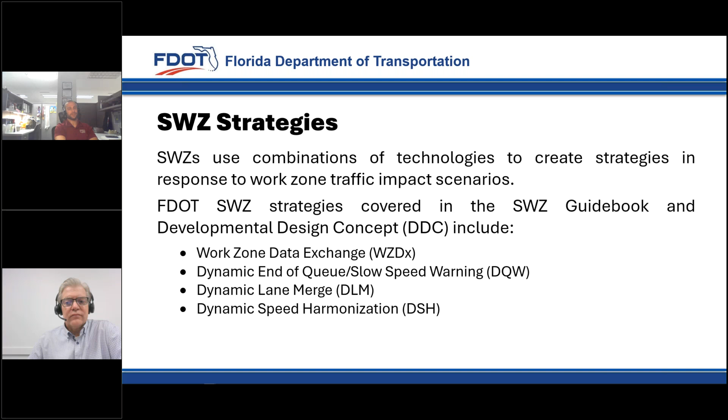To date, FDOT has developed guidance materials, developmental standards, and specifications for 4 smart work zone strategies: Work Zone Data Exchange, known nationally as WZDX; Dynamic Queue Detection Slow Speed Warning, or DQW; Dynamic Lane Merge, or DLM; and Dynamic Speed Harmonization, DSH. Except for WZDX, these acronyms are primarily used only within FDOT. The strategies, technologies, and guidance materials are described in greater detail over the next few slides.

The first strategy is the WZDX, a national program sponsored and promoted by the Federal Highway Administration. FHWA has developed the Work Zone Data Exchange specification to provide uniform guidance and instructions. The WZDX enables infrastructure owners and operators, like FDOT, to make work zone data available for third-party use.

The goal of the WZDX is to enhance the ability of vehicles equipped with automated driving systems to safely and efficiently navigate work zones. FDOT is planning to transition towards the use of WZDX for projects on limited access or high-speed roadways with a level of service E or F, existing or anticipated during construction, with work zone traffic impacts lasting 5 days or more, and with a construction duration of 6 months or greater.

The WZDX uses a roadside device that transmits its location and certain messages to the cloud using cellular internet. The WZDX devices are placed at roadwork ahead sign locations and are located on PCMS and arrow boards. The message the WZDX device transmits is based on its location. For example, a WZDX device located within an arrow board will transmit a right or left lane closed message to the WZDX data exchange hosted by FHWA.

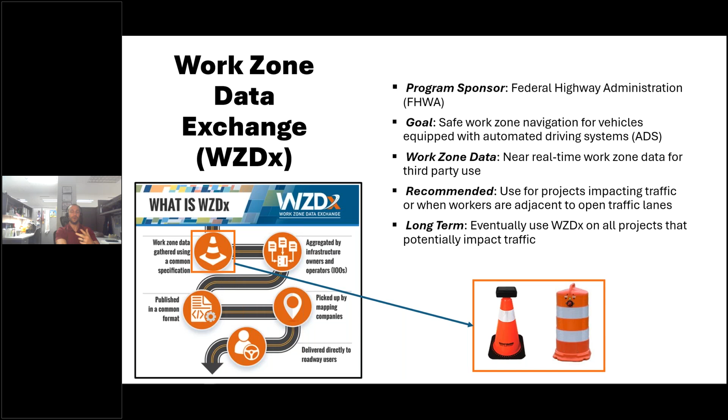The next Smart Work Zone strategy used nationally is the Dynamic Queue Detection Slow Speed Warning. FDOT has abbreviated this strategy as the DQW. The DQW is deployed where lane closures, restrictions, or other construction activities may cause traffic to slow or stop. This causes queues to build upstream from the traffic restriction, often resulting in stop-and-go or slow-and-go conditions that could potentially cause rear-end collisions.

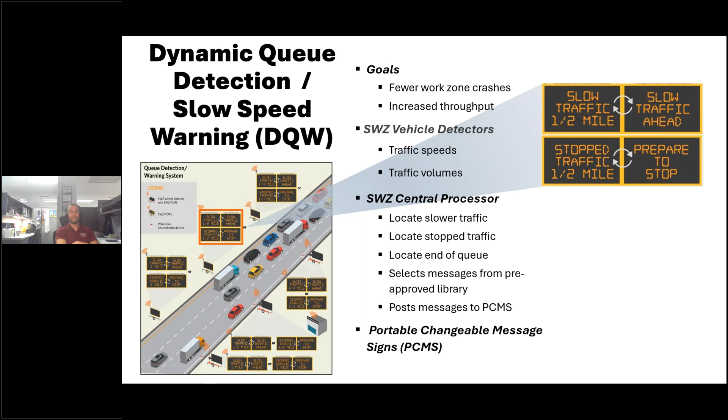The strategy is used to alert motorists of the conditions ahead, giving them heightened awareness and time to slow down before coming upon the downstream congestion. The DQW uses Smart Work Zone vehicle detectors located in and ahead of the work zone to monitor traffic speeds and volumes. Algorithms developed for the speed of traffic and placement of equipment are set to activate upstream Smart Work Zone PCMS messages to warn traffic of the condition ahead when certain vehicle speed and volume thresholds are met. The messages provide information on the traffic conditions, whether slow or stopped, and the distance the motorist is likely to encounter these conditions.

Another frequently used Smart Work Zone strategy is Dynamic Lane Merge, or DLM. The DLM strategy is used for highway lane closures to increase safety and reduce traffic delays. Typically, during a highway lane closure, some drivers move over immediately once they see the first advisory sign, while others wait until the last possible moment before merging over to the open lane. This variability in driver decisions and attitude results in traffic speed differentials, hard braking, road rage, and crashes.

The DLM strategy is used to create more orderly merging conditions at lane closures based on traffic volumes and communicates guidance to drivers through PCMS or through connected vehicle onboard units. This strategy has two operational scenarios: dynamic early merge and dynamic late merge, also called the zipper merge.

The dynamic lane merge early merge operation works best for low traffic volume conditions, where there are ample gaps in traffic to get all vehicles to merge into the open lanes early so that they are traveling at uniform speeds when they approach the lane closure.

The DLM late merge strategy works best when approaching traffic volumes are nearing or exceeding the capacity of the remaining open lanes. Unlike early merge, where drivers are encouraged to move lanes as soon as possible, the late merge directs motorists to stay in their existing lanes and merge at a single point just prior to the lane closure. Motorists are then directed to merge, or zipper, with other drivers by taking turns in an orderly fashion. Late merge has been shown to reduce crashes and delay for lane closures in high volume conditions.

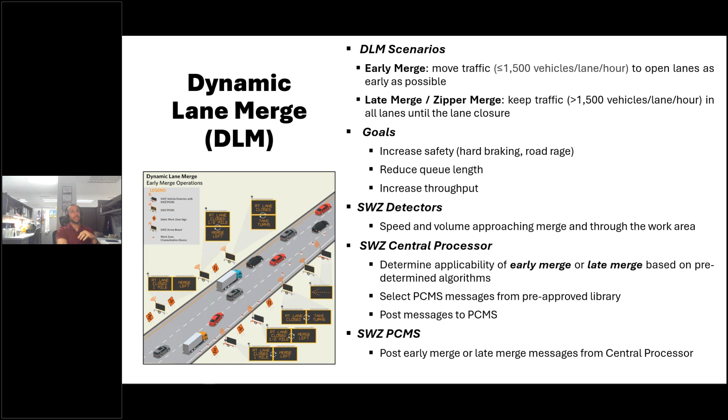The Smart Work Zone Central Processor uses data from the Smart Work Zone portable vehicle detectors to implement either early or late merge based on real-time traffic conditions, transitioning between the two modes as traffic conditions change. The Central Processor posts the relevant messages to the Smart Work Zone PCMSs from a library of pre-approved messages. The next two slides will show possible Smart Work Zone PCMS messages for early and late merge scenarios.

This slide shows possible PCMS messages for the dynamic lane merge early merge scenario. The Smart Work Zone PCMS directs drivers to move to the open lanes early so that by the time they get to the lane closure, all traffic is merged and flowing at a uniform speed.

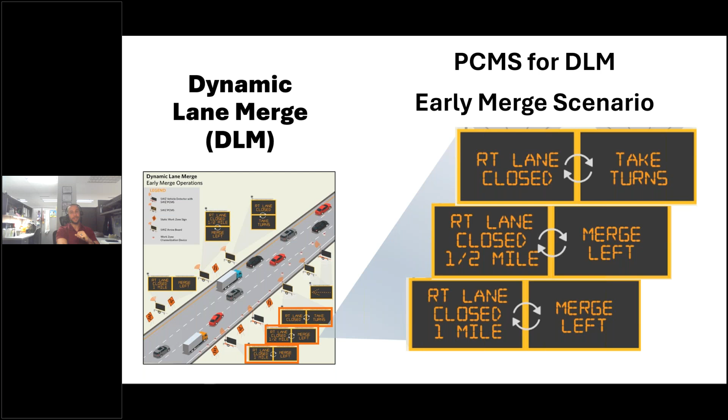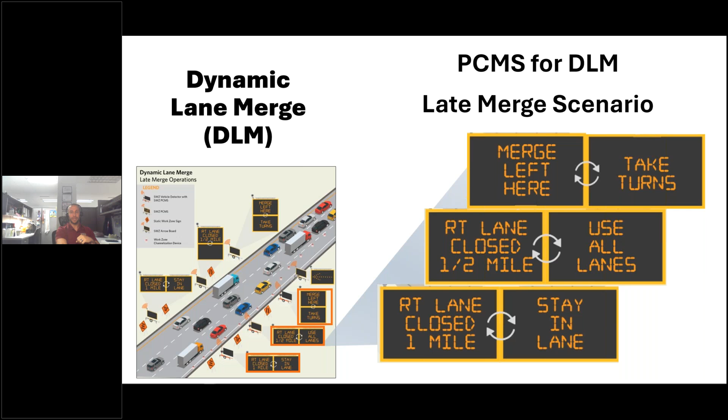This slide shows possible PCMS messages for the dynamic lane merge late merge scenario. The Smart Work Zone PCMS directs drivers to use all lanes until they get to the merge point. At the merge point, drivers are encouraged to take turns or zipper into the open lane or lanes. A zipper type merge has been attempted using only static signs, but directing drivers to merge late during low volume conditions may result in hazardous maneuvers at the merge point. As noted earlier, this operational scenario has been shown to reduce delay and reduce the overall length of queues resulting from the lane closure when high traffic volumes exist.

A less commonly used but promising Smart Work Zone strategy is Dynamic Speed Harmonization, or DSH. DSH is intended to uniformly reduce speeds as traffic approaches areas of traffic congestion, bottlenecks, incidents, special events, and other conditions that affect traffic flow. The DSH strategy assists in maintaining traffic flow by reducing unnecessary stops and starts and maintaining consistent speeds.

The speed limits generated by the SWZ's central processor are displayed on Smart Work Zone portable variable speed limit signs and are sent to the WZDX to be available as onboard messages for connected vehicles.

There are two common instances for using the DSH in work zones. The first instance is when traffic speeds vary through the work zone and or where traffic speed approaching the work zone is considerably higher than the speed through the work zone. The second instance is when lower speed limits are needed to protect workers who are close in proximity to passing traffic, as compared to when they are protected by barriers.

The Smart Work Zone central processor gathers approaching and through vehicle data for the work zone. Using predefined algorithms, the Smart Work Zone central processor calculates and sends regulatory speed limits to the portable variable speed limit signs, with the intent of gradually slowing traffic as it approaches the slowed traffic condition or bottleneck.

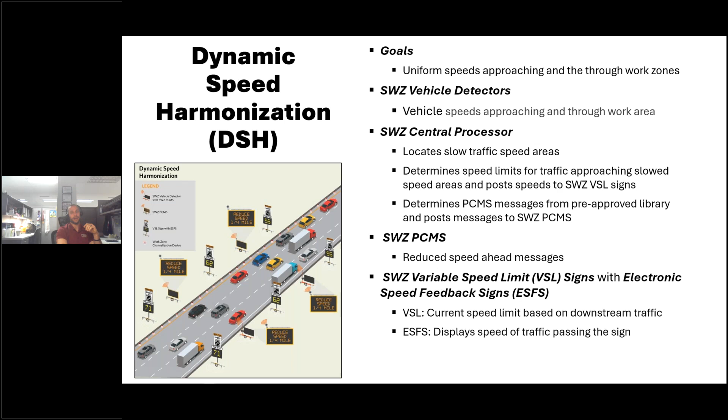So the next slide is going to show a conceptual layout for the dynamic speed harmonization strategy.

For this strategy, speed limits are determined by the Smart Work Zone central processor, again using the pre-approved scenarios for setting the maximum and minimum speed limits, and the incremental speed limit changes from VSL sign to VSL sign. The speed limits are based on current downstream traffic speeds. Smart Work Zone PCMS warn motorists the distance until the next reduction in speed that will be shown on a Smart Work Zone variable speed limit sign.

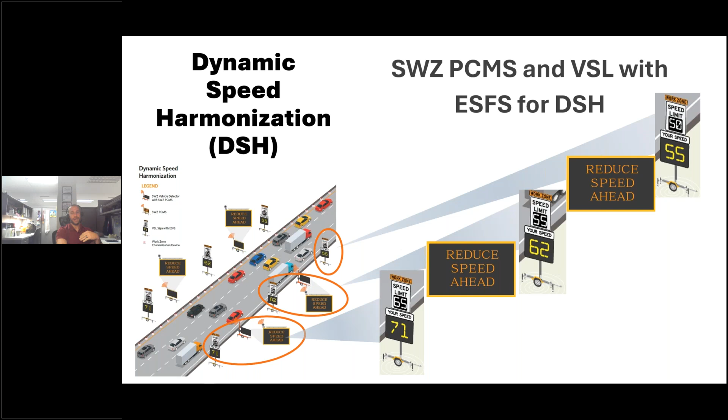FDOT's speed zoning manual requires speed limits to be approved by the district traffic operations engineer or delegate. Typically, this role will be delegated to an operator at the Regional Transportation Management Center who will review and accept the speed limits generated by the Smart Work Zone central processor through an internet-based interface with the system. An advantage of this strategy is that lower speed limits can be posted where workers are present, or allowing a higher speed limit where workers are not present and where lane restrictions allow a higher speed limit.

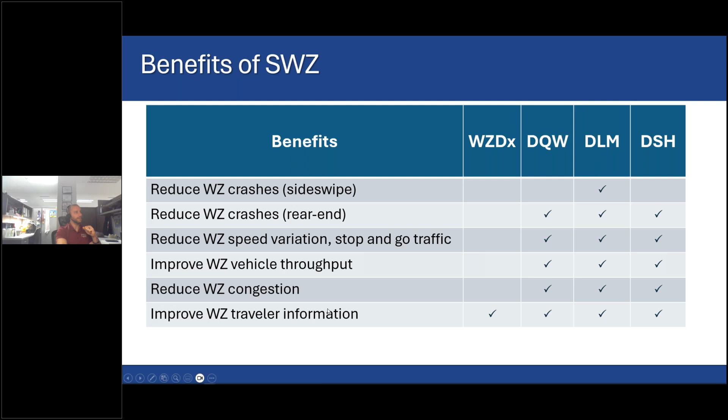Might need your help, Justin. Thank you.

The FDOT Transportation System Management and Operations, TSMO, strategic plan identifies mainstreaming as a priority focus area for TSM&O, including Smart Work Zone implementation. FDOT uses guides, standards, manuals, and specifications to mainstream transportation practices and technologies. Altogether, these documents will lead to a consistent Smart Work Zone implementation. With consistent implementation, drivers will have greater awareness and recognition of Smart Work Zone strategies as they traverse work zones. Over the next few years, FDOT will gain additional familiarity with Smart Work Zones and continue to improve the standards, FDOT design manual, and specifications.

Thank you, James. If we can go to the next slide, please. So as James mentioned, we had 4 documents in particular that were developed to help communicate to designers and contractors what's needed for smart work zones. In order, it's the Smart Work Zone Design and Operations Guidebook, developmental standard plans, developmental design criteria for the FDOT design manual, and then also some dev specs were put together particularly as well.

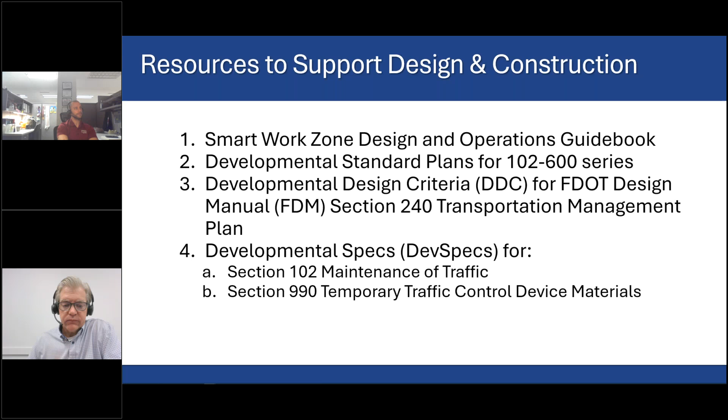The Smart Work Zone Design and Operations Guidebook is really a layperson's instruction manual to help make you familiar with these technologies. It's filled with illustrations and simple explanations to help understand what we're trying to do before you get to detailed design or implementation in construction. If you're looking at our particular technologies, I'd encourage you to take a look at this document first as a good high-level overview.

It provides information on the programming and scoping of these types of projects, and talks in detail about the identification and selection of Smart Work Zone strategies. Also, because it is ITS, it requires systems engineering analysis and touches on that. It also looks at how these technologies should be folded into the public information plan.

As mentioned before, the developmental design criteria is what's married into the design manual. We've updated the different sections to include not just standard work zone information, but embedded information about what to do with different types of smart work zone technologies. You see speed harmonization, dynamic lane merge, and dynamic queue detection, all part of the different strategies to help take care of different demands or needs that traffic can create in the work zones.

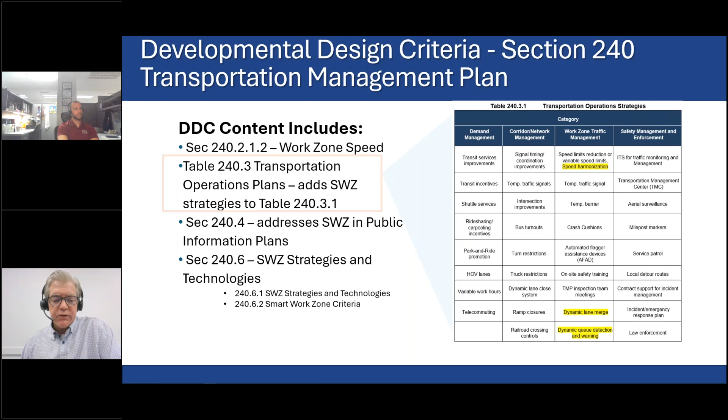Developmental standard plans serve as a kind of template for designers as they take a look at their specific work zone and say, how should we lay out these particular technologies or each element that's part of this whole system.

As James always wants me to emphasize, and I say it all the time to designers, this is just a guide. It gives you a general idea of how to place things, but designers have to be responsible for the layout and placing them in a sequence that meets their specific situations. We have them for all three of the technologies described.

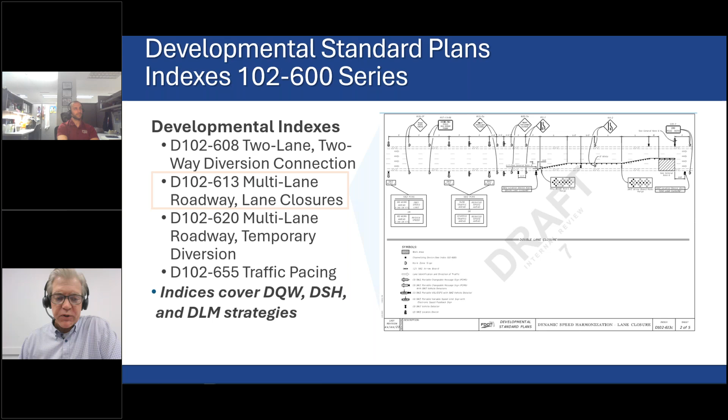And of course, having the specifications we need. The first one, DevSpec 102, talks about the pay items, how the systems work and function. The second part, DevSpec 990, talks about each one of the specific elements in there, the VMSs, the variable speed limit signs, all of those in great detail, so designers and contractors know what to bring to the field in implementing their systems.

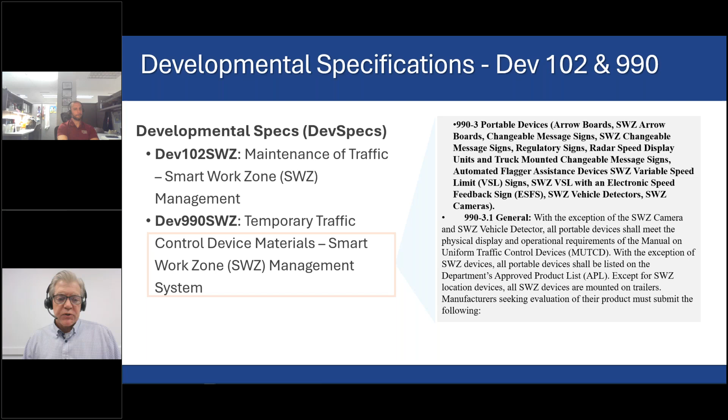And of course, FDOT, we have our safety message. Work zone safety is everyone's job. Watch vehicles entering and leaving the roadway, beware of workers while driving through the work zone, follow the posted speed limit, and avoid distractions.

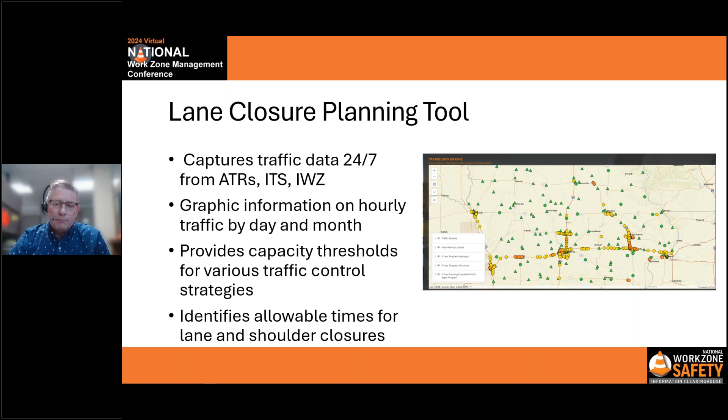Another tool we've incorporated - we've got all these traffic sensors, automatic traffic recorders, ITS sensors, and any IWZ devices we deploy are capable of collecting traffic information for us. Our goal was to take all this information and put it into a graphical form where we could look at what we were expecting for hourly traffic. This system takes 24/7 counts and massages it, and I'll show you in a future slide, we're looking for allowable work times.

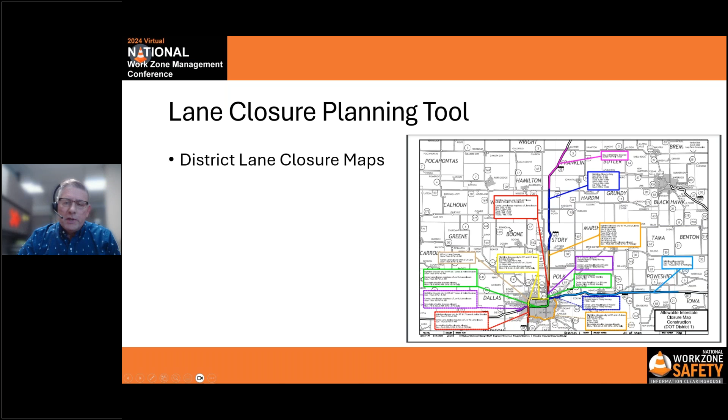Now that got to be a little bit much for some of the designers and districts, so we took that information and condensed it into what we call district lane closure maps. Those maps are color coded, showing the same stretch of roadway as the lane closure planning tool, giving the allowable hours based on color and time of day - whether they can close a shoulder or a lane, or in some cases, if there's more than 3 lanes, they may close a couple lanes. This information going into these maps is what goes into the plan for the contractor.

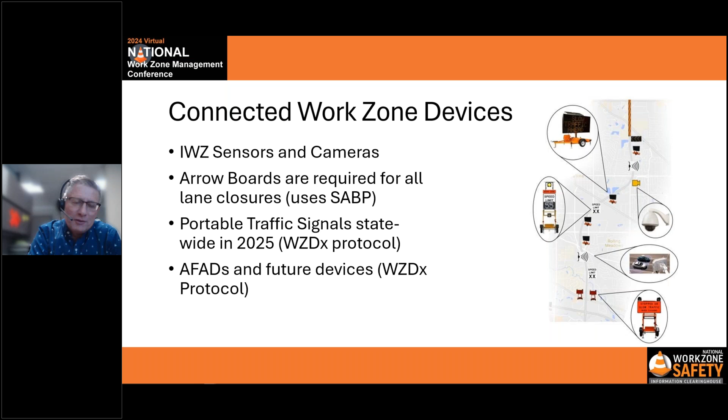Now, a little bit about some of the connected devices. All the IWZ devices we're putting out there are sending information to the Traffic Management Center. In addition, the arrow boards - we're requiring connected boards for all lane closures in Iowa now. Next spring, we'll start deploying portable traffic signals to collect information on location and operation. As future devices come on board, AFADs will probably be next. The whole idea with connected devices started with the arrow board because it was simple - turn it on, the contractor had to do nothing else. The problem we're having now is we want to know where the end of the work zone is too, and so far we haven't found a foolproof device to do that. Somebody's got to turn a switch someplace. So if anybody's got any good ideas, let me know.

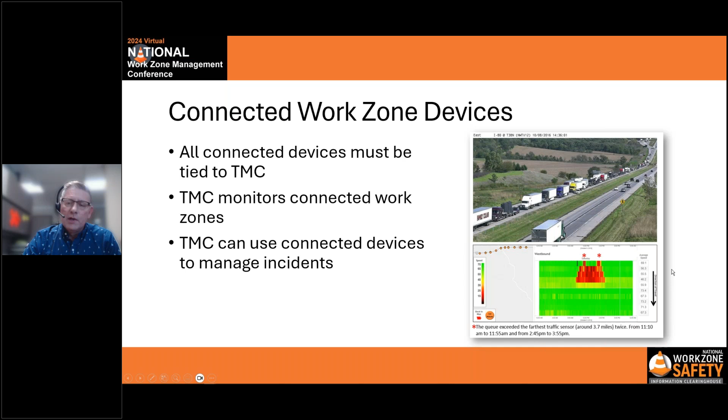So like I said, all this information is going to the Traffic Management Center. The Traffic Management Center that we have is one location here just south of us in Ankeny, and they can watch everything that goes on, including the work zone devices that we put up for temporary use. They're connected into all that information, and they can use those devices to manage incidents that might happen, whether it be in the work zone or not. So they've got additional devices at their disposal for traffic management.

I was talking about the arrow board. So in 2019, we developed a protocol. We thought, why shouldn't we be able to identify where a lane is closed? And that just seemed natural. Let's go for the arrow board. So we developed our own communication protocol for the arrow boards. We worked with the manufacturers and the contractors to finalize that specification. And in 2021, we required that all lane closures on the interstate had to have the connected arrow boards, and then we extended that into all lane closures in 2022.

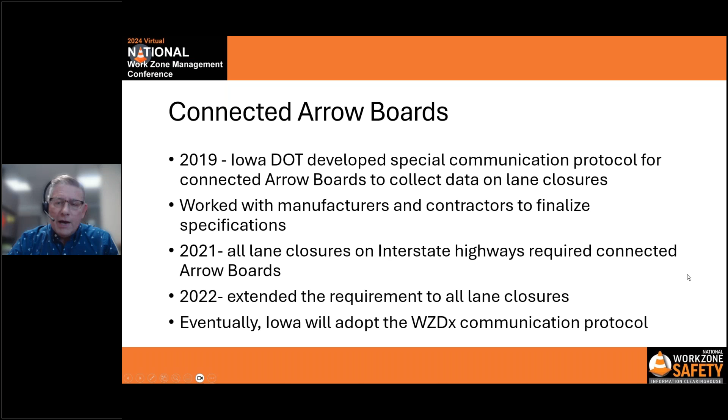Right now we're using our own protocol. If anybody asks me for information about what we use for specifications for connected boards, I always throw them back to the WZDx protocol, just because it's more common. So eventually we'll switch over to that also.

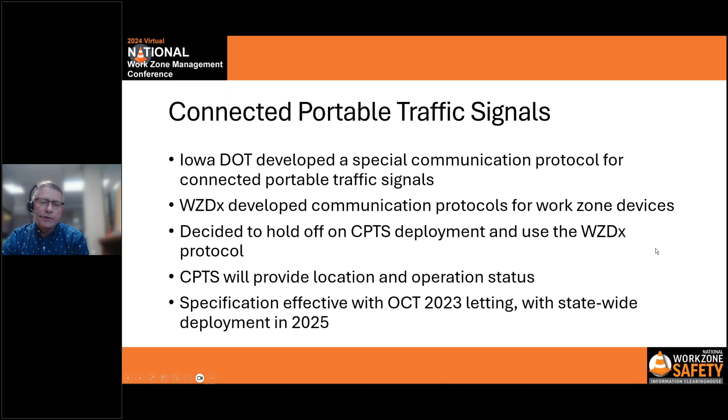The next thing we're looking at is connected portable traffic signals. In 2025, that's when we're going to go into effect with that on projects. It's going to be a statewide deployment also. We started developing our own communication protocol, but then when WZDx decided to put a protocol out for work zone devices, we decided to hold off on that until that was finished so that we didn't have to redo it.

Talk a little bit about data analysis. So you can imagine we're collecting a vast amount of data with all these devices coming into the Traffic Management Center. The Institute for Transportation, INTRANS at Iowa State University, they're our key partner for organizing and keeping track of all our data. And Skylar, who was on earlier, he's the guy that I don't want to have get hit by a bus or something, because if he's gone, we're in trouble.

With what they've done with some of the data analysis, they can generate daily and weekly reports of our connected work zones. And my advice to anybody who wants to try this data thing is to get a university partner, because they're the ones that are going to keep you moving.

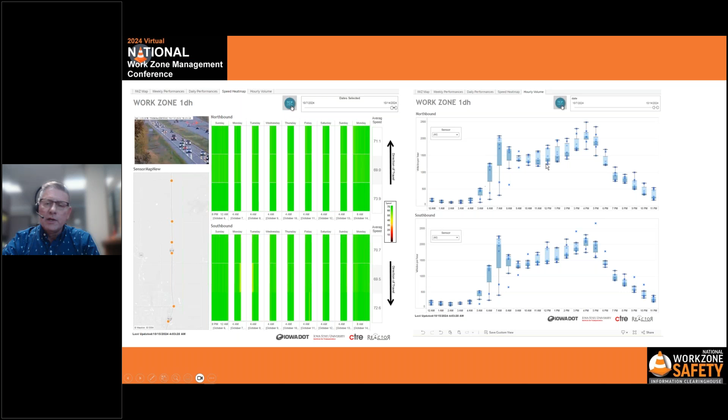Besides the connected devices we've deployed, we can use probe data. Skylar talked about this a little. If you have an incident where you don't have any equipment set up, you can go back and analyze what went wrong, how long the queue was, the duration, things like that, just using probe data. So that's kind of exciting.

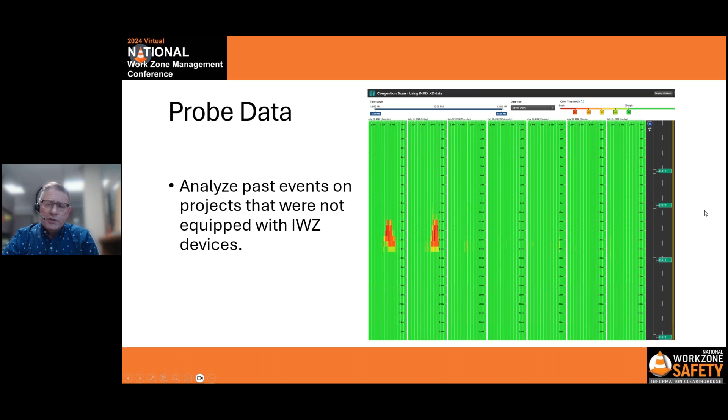My biggest thing I like now is the connected vehicle data, like Skylar and Darcy were talking about, because we can actually go out and check for hard braking. Usually hard braking means you've probably got congestion or something else going on in that work zone. So there's a lot of different analysis we can do with the connected vehicle data.

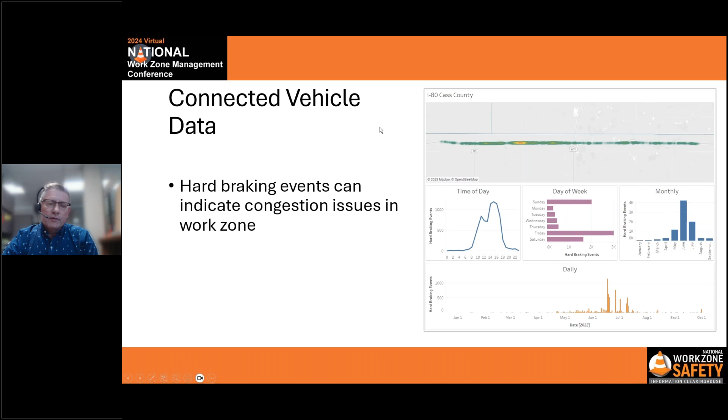My favorite is the one Darcy showed before, the trajectory lines of each crash, because when there's a crash you can see how the queue starts building up. With time on one axis and distance on the other, this tells you how fast that queue may be building and to what extent it's going to interfere with traffic further upstream. I think this has real potential, when you subscribe to live connected vehicle data, to detect incidents without ever deploying any IWZ equipment, for things like end-of-queue warnings. That's what I think is really exciting.

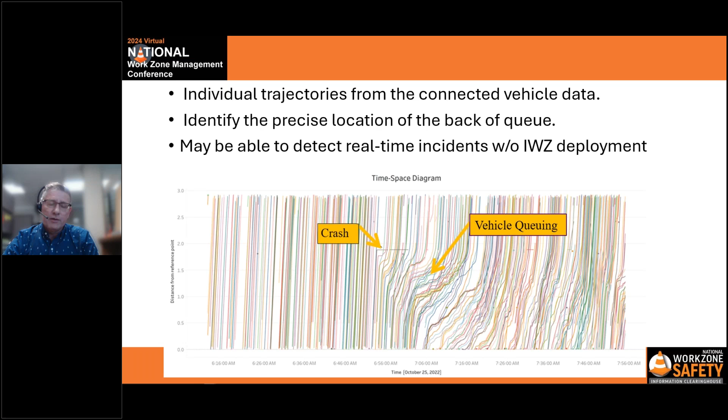In summary, when it comes to smarter work zones, one of the biggest things is to make use of multiple data sources. Don't just depend on one, use whatever is at your disposal. Make sure the data is available to your field operations staff so they can manage the deployed work zones, and the designers need it too, so they can do a better job designing work zones and staging and get a better idea of project costs.

A lot of times, before we ever finish the concept, we're looking at the data and the traffic to get a better idea of what it may cost to deploy some of these intelligent work zone systems, because it's going to change the cost of your project. So the sooner you know that, the better.

It's also important to have that historical data so that your management can use it, or you can use it to inform your management, to make better overall work zone strategy decisions.

One thing I didn't mention was that for the IWZ deployments we put out for our work zones, we have a single statewide contract that we use for all the different projects, so we don't do it project by project. It's not up to the general contractor bidding the project; we have a separate contract, and it really makes things flexible. We're not afraid to spend money on a small project. Usually you'd think the IWZ would cost more than the project, but with the statewide contract it's more flexible, and I think the cost gets spread around a little better.

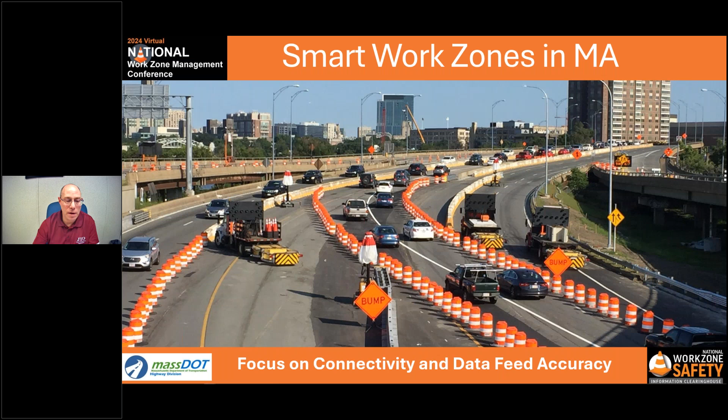If I can get this to... I can't get the slide to advance. Nope, hold on, there we go. All right, so the first slide I'm going to cover—oops, I skipped my agenda.

Smart work zone practices, I'll cover those first, a little bit about what you saw from Florida, from James. Then I'll go into our connected work zone notification system, and close it out with our work zone manager, talking about our lane closure requests and how we're validating the data. So first we'll start with real-time traffic management.

Smart work zone practices in Massachusetts have long been established. We've been putting them out for a number of years, and it's now been institutionalized into our program. Our design engineers and project development folks know what to do, they know to follow the process. We do have a scoring matrix which helps evaluate the need for smart work zones.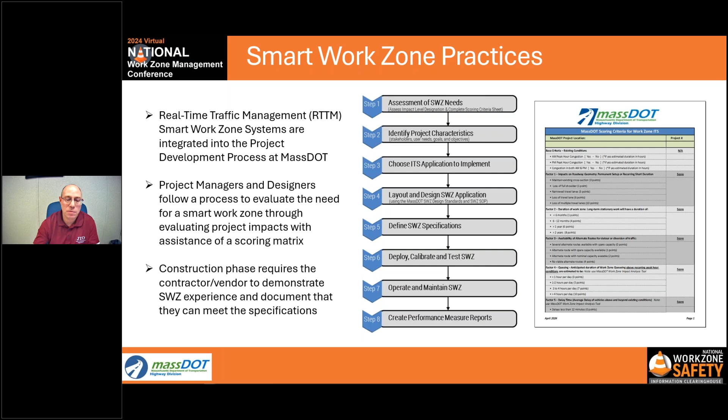I'd like to say it's a smooth operation. There are times I wish the designers would talk more to my section, but for the most part we make sure everything works well. One key thing is on the construction side, making sure the vendors and contractors demonstrate that experience so they can meet the specifications for the job.

MassDOT specifications have been fairly consistent for at least 10 years. We've only done a few minor updates.

They are rather lengthy, and I've received comments from some vendors about how much detail we have in there. So we're in the process, like Florida and a few other states, of streamlining the specifications to lessen the burden on the vendor. We eliminated some qualifications package requirements, especially where vendors have been doing work with us.

We don't need to re-see everything from them. We added language in recent years about the API data feed because we've been a WZDX feed state for a number of years. We've also lightened up—we used to be really focused on all sensors in our work zones, and now we're using a lot of probe data. We still like to have sensors out to get speed, volume, and occupancy information, particularly through the work area.

So our change is focusing on, like Florida showed earlier, making a plug and play type system where you'd have the option of a basic travel time system, a back of queue system which also includes travel time, and then the Cadillac—the dynamic merge system, which also includes back of queue and travel time. We're also introducing individual pay items, so you'd have pay items for the different types of equipment needed to put these systems out, and then for the overall system needed to run the background operations and algorithms.

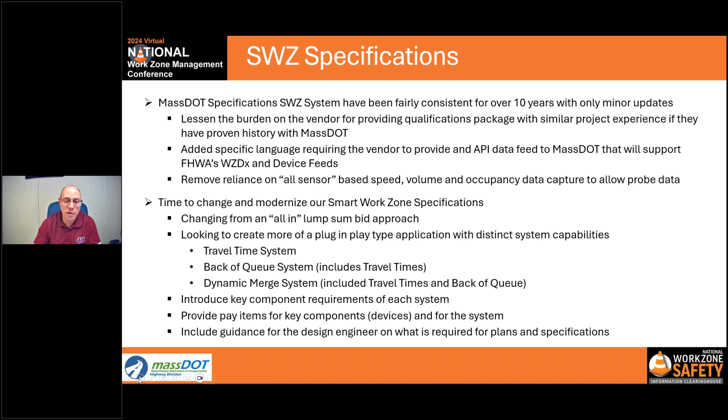We've been using this more frequently where we have an alternate route and travel times for both routes, giving the motorist the option to stay on the route where the work is happening or to divert and take the alternate route.

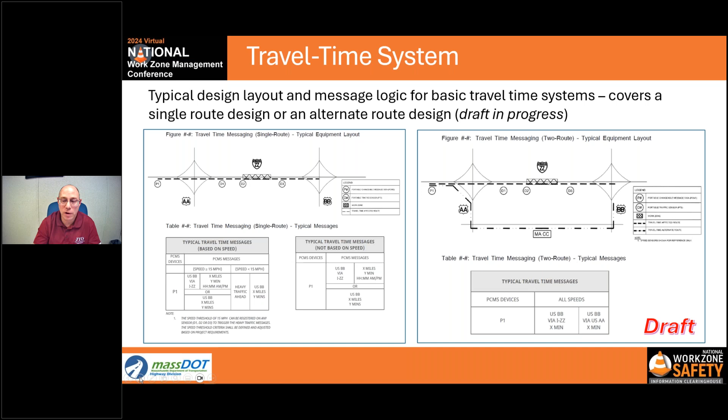We don't have a lot of alternate route opportunities in Massachusetts. We just weren't built like some of the younger states where you have parallel freeways and whatnot. So it's usually a crapshoot for us, but we have tried this from time to time.

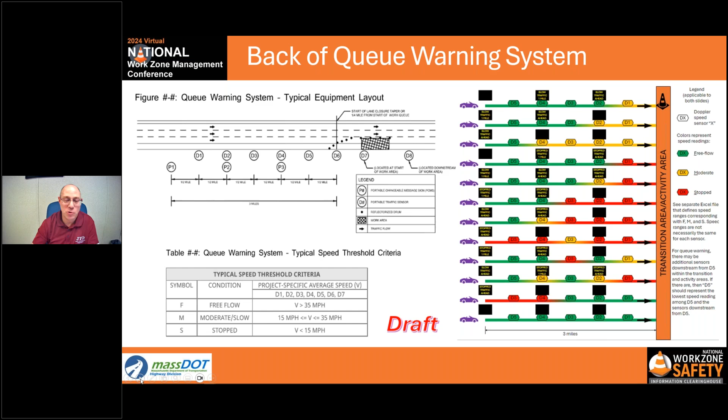In Massachusetts, our drivers don't always play nice. The concept of the friendly merge is usually not used, so we actually find that putting up a sign telling them what to do has been helpful. It's definitely an opportunity for us to continue doing this.

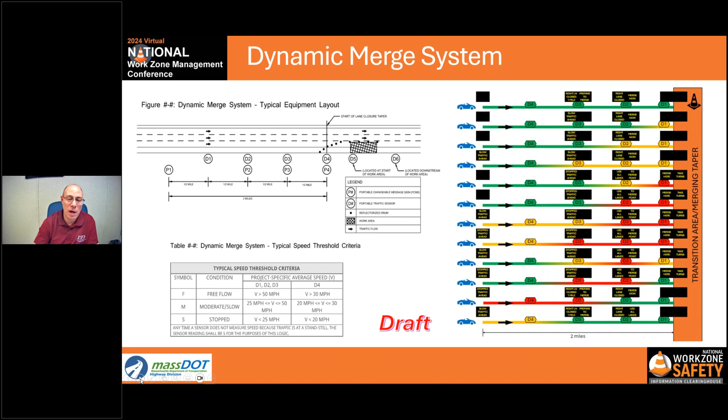So now a little bit about our connected work zone notification system, and yes, that is definitely a mouthful. Hopefully our designers and our people in field offices and construction will start to understand the CWZNS, or we have to come up with a more creative name.

We're currently working on developing new specifications for this. We're about 90% completed - I think the real meat of the specification is done. The last component we've been stuck on is the final agreement on pay items, because we're introducing new items and have a specifications committee to work through, as well as penalties. If the contractor puts out equipment that's not working and not performing, we want to be able to deduct some of the daily pay we're paying for. So that's where we're stuck.

But the system itself consists of the start and end markers - we want to digitally mark those points of the work zone. A connected arrow board or multiple arrow boards that would all be connected to give information about what's happening. The dynamic work zone speed limit assembly - that's another long term we need to shorten - basically displays the speed limit on a hybrid speed limit sign, so when we reduce the speed, we're tracking when and where that's happening, in case there's a crash and we need to provide data to law enforcement.

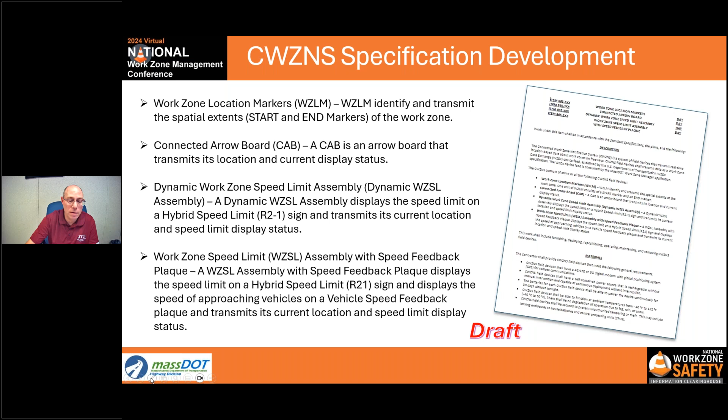Once we've established that people entering the work zone have a reduced speed limit, we want to use one, two, or multiple feedback assemblies throughout the work zone, continuing to remind people about the speed limit, but also giving them feedback so they can hopefully see that they're compliant and paying attention. So that's the nuts and bolts of our dynamic, or connected, work zone system.

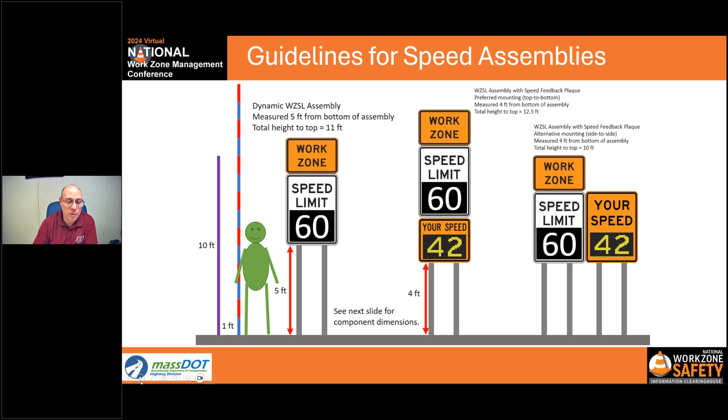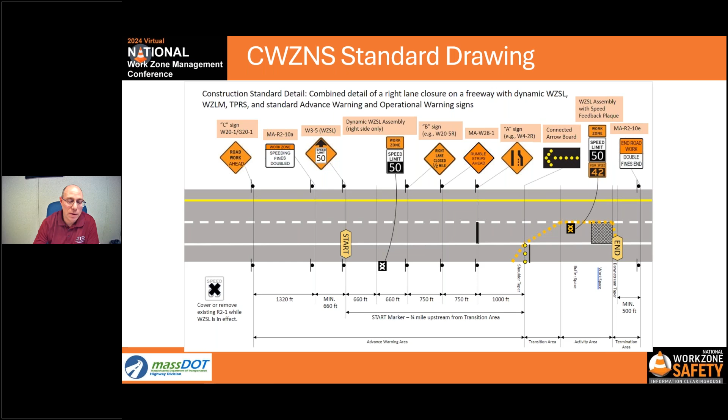Okay, here's our work zone manager. It's going to be our next item.

For a number of years, we started developing a web-based, user-friendly application to track our work zones. The goal started initially because we had a number of smart work zones out there with several different vendors. Our construction folks were complaining they had to learn too many different systems, so we first set out to build something as an overlay to cover all the different smart work zone companies out there, so we're all on one uniform platform.

Once the WZDx effort was initiated, we stopped production on that, pulled back, and then started to pull in the planned work zones. Now we've come a long way with the work zone manager tool - it allows us to configure, manage, and monitor all those planned work zones. We can also see where all the portable field devices are, whether smart work zone or connected. We allow some reporting of work zones and historical data - I know Dan mentioned the importance of knowing what you have out on the roadway and where. We can also integrate with planned events.

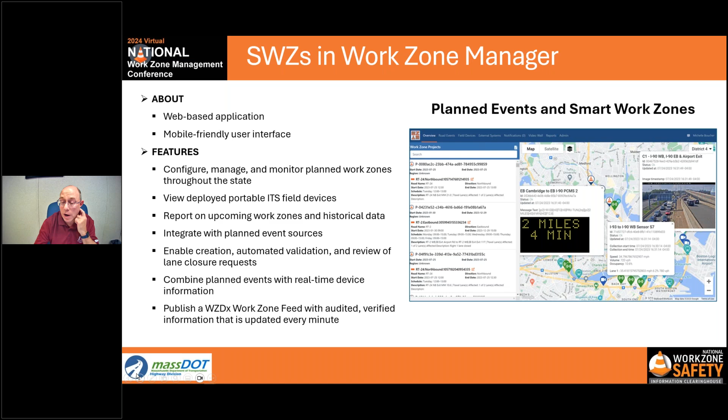So we know that if there is a planned event and we're trying to do a lane closure, where the conflicts are, one of the keys was to develop automated validation. When we have planned events and devices out there, we can associate them to validate that they're actually happening, and publish the work zone data feed that we require from all devices as well as our planned events.

What's new in the last year is we started developing a new modernized lane closure request tool. We used to have a very antiquated system, so the goal is to improve the quality of planned work zone data. The tool is built 100% on the concepts of WZDx, the terminology, and it was configured to be user-friendly so that the resident engineer or construction inspector could put in that request.

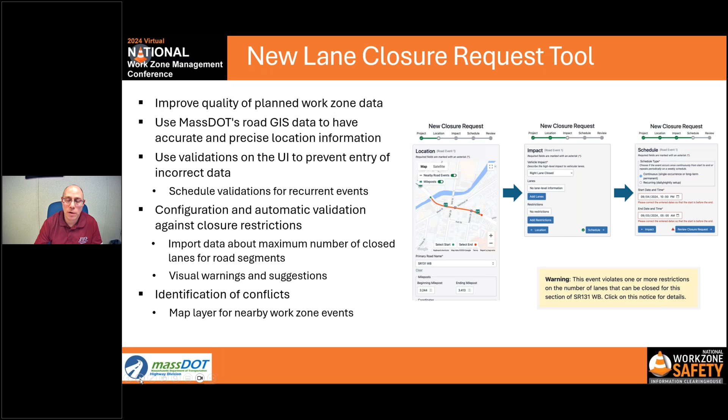The information they're capturing will be in a format that's easy for WZDx and the end user. It's configured so we can do automatic validation of different closure restrictions - time of day, how many lanes you can close based on time of day, how close you can be to an adjacent work zone. Those warnings are built in, and the goal is to be cognizant of all the work going on and prevent conflict points.

Part of that is the approval process. Right now we rolled out this pilot with one of our districts throughout the 2024 construction season, and the goal is to allow district staff to review requests coming in from all the different construction projects. They have dedicated staff in their operations group that review them, look for conflicts, make sure they're following time of day restrictions, and then approve that lane closure. If there's data missing, it can kick it back to the field office for more information, or if there's a conflict. We have a formalized process to approve that, so it helps us know what's going on.

There are warnings, and one of the new things we built at the same time is a project with Kittelson Associates to build a lane closure impact tool based on our volume network. We have permanent count stations pulling in annual count data, and we're evaluating using volume to capacity ratios - how much volume is on that roadway based on the number of lanes - to determine when we can close the highway.

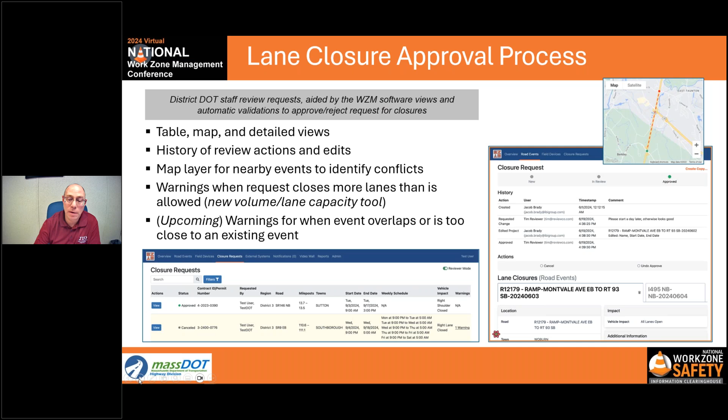This is bringing it all together. We now have better quality information with the requests coming in. We have the goal of getting the connected work zone notification system specification into all of our freeway and interstate work, so that we're digitally mapping all of those locations. The goal is to have high quality planned information, then devices deployed in the field that when activated will validate that it's a true and active work zone, so we'll be able to better track when those things are happening.

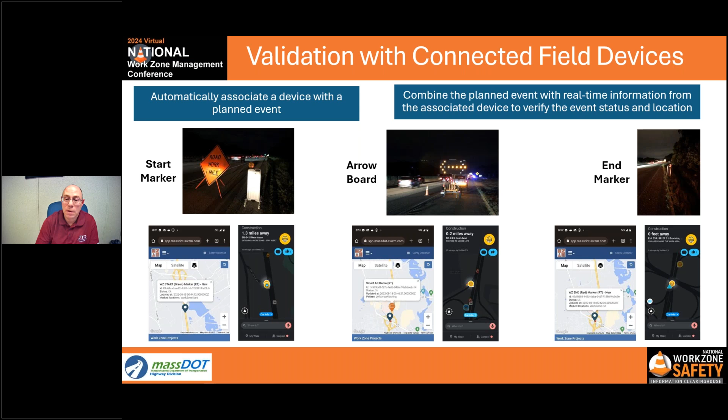This is showing an example of a start and end marker, an arrow board. It shows how it's connecting to our Work Zone Manager tool, and it's also being fed to Waze. Waze is pushing that information so the driver sees detailed specifics about where the work zone starts, the operation of the arrow board, and where the work zone ends - that's with that automated association. We just rolled that out two weeks ago.

We submitted for a SMART grant earlier this year. We spent a lot of state money developing this. We used a US DOT grant to develop the device feed to standardize all the different devices used in smart and connected work zones, recognizing the importance of having one standard language throughout the country. Why have different states with different requirements? Let's all use the same language.

So the next grant is to continue advancing the tool, enhancing data capture, and building in performance metrics. We're capturing data, but we really haven't done a lot with operational performance metrics yet. That's the next step.

We want to harmonize all the data from different sources. There's other information we can pull in that we think will be beneficial for reporting on work zones. The key here is situational awareness. If we can provide our public, either through our Mass 511 site, mapping providers, or even onboard connected units, the more information we can provide to motorists, the better and safer we'll be in the work zone.

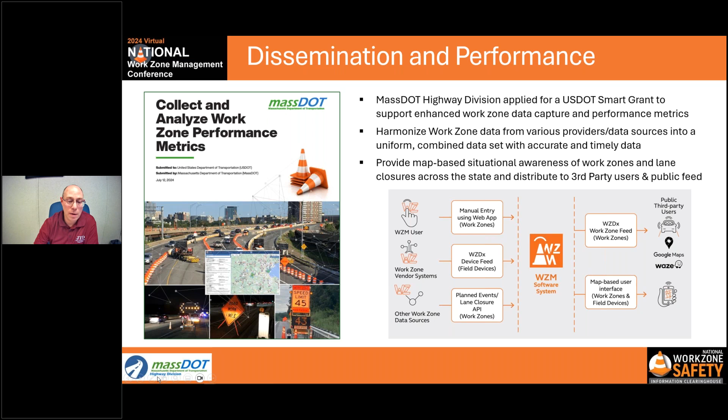That's it. Thank you. So now I guess we can open up to questions for everyone.